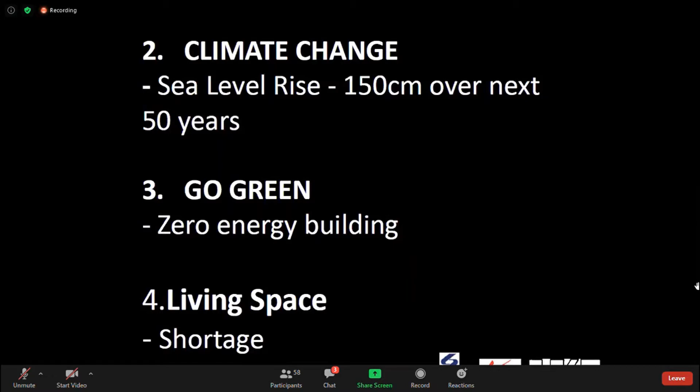Shortage. Then item number 5, challenge number 5: water. So, as everybody knows, we are relying on our neighboring country for water supply to some extent. We are trying now to create sources to have a self-sufficient supply of water. So what can we do, or what have we done? We'll share with you later on shortly.

So these are the challenges. Next, workforce shortage. Typically, our local people are not so much involved in the brick and mortar laying, construction. So we rely a lot on foreign workers—we're talking thousands of work permit holders, not to mention other supervisor grades, manager grades, and engineers or whatsoever. Just on work permit holders, we have got 300 thousand in the industry. So what can we do, or what should we do? Government has also come up with some ideas, big directions, so we'll share.

The next challenges. What do we face? Materials. This is also one of the challenges, on and off.

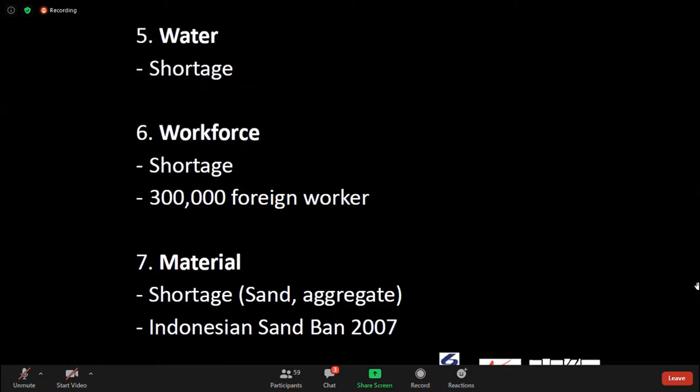Okay, so these are all the challenges. Number 8. So this is also another big challenge that we are facing. We want zero fatality rate on construction sites, particularly in the construction site.

We always tell ourselves, one failure is too many. One fatality is too many. So we try to bring it down where we can. We have come up with a lot of ideas here and there on what to do.

Last year, 2019, the numbers worked out to be 1.1 fatalities per 100,000. Our target at 2028 is 0.9. So these are challenges. It looks like last year we moved nearer to our target, but more can be done. As we said, one fatality is too many. Life is just too precious to lose.

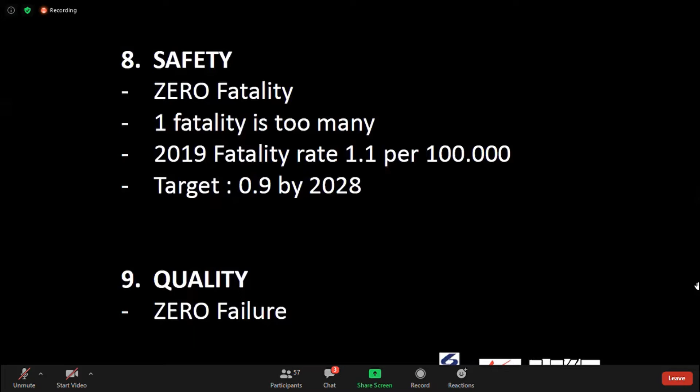Okay, so the next challenge is safety and quality. Similarly, we say zero failure. I will share with you over the past years what failures we have had. 1979 - I guess many of you were not born yet.

Our Eunos viaducts came down during construction. The next day, I went there, I was on the site, to see how the cracks had actually developed, and so on and so forth. So that's just to share with you, things like this have happened before.

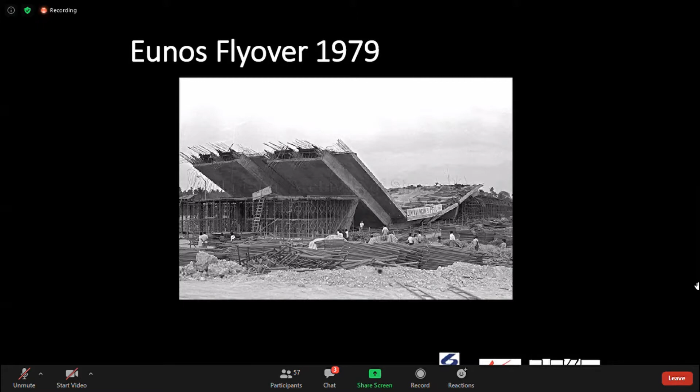We are still doing very well because we are not having that many failures per se. Okay, then the next one.

This one is actually so far the biggest failure in our history, where we claimed 33 lives, 33 people were killed. I assume many of you are still not born yet. The alumni may be around - some who worked for 10 years were probably aware of this.

The New World hotel collapse in Little India - a 7-story hotel collapsed, and then the rubble could be seen. Okay, next.

This is also another collapse - a school roof structure during construction collapsed, in 1999. The next one, this is another big one, Nicoll Highway.

When Nicoll Highway collapsed, I was actually sitting in my office. I looked out the window and witnessed the collapse - I saw fire coming out at the side. My office is just next to Nicoll Highway, happened to be that way. So these are the things we should try to avoid where we can.

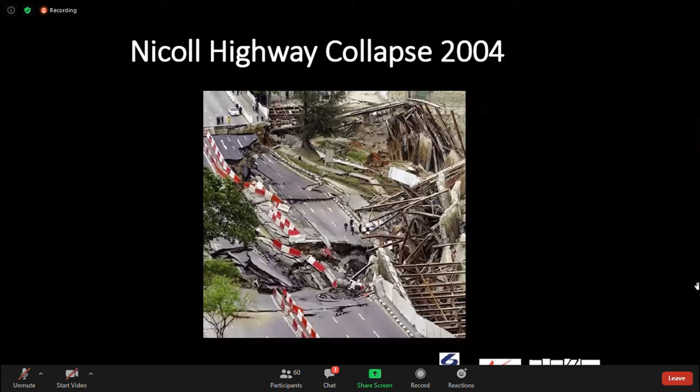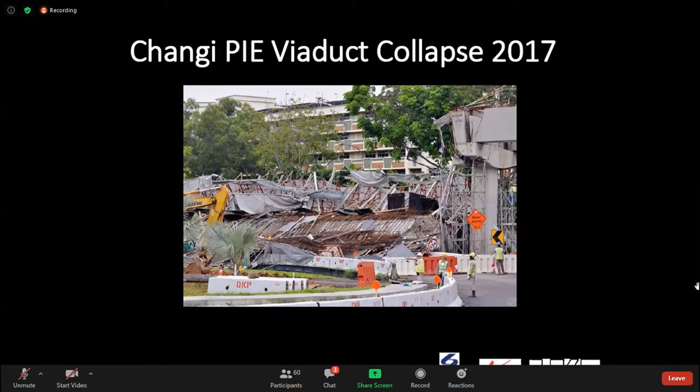Okay, next, the last picture to share on failures will be the Changi viaduct collapse, 2017 - coming up to 3 years, 2.5 years now. These are some of the biggest ones that we noted, and we want to share with the younger generations. We should learn from our past experience and try to avoid it.

So as far as quality control is concerned, these are the challenges - we want to make sure there's no collapse, no failure again. One is just too many.

Number 10, productivities. We want to improve the productivity of our construction industry, our built environment industry. We were told that this industry still has a lot of room for improvement in terms of productivity. We are still quite old-fashioned in a way. We'll discuss the solution later on.

Then comes the economy, of course. After all the other challenges we mentioned, now we talk about economy. We also want to bring down the cost if we can. We want to ensure safety, ensure quality, ensure productivity, and so economy.

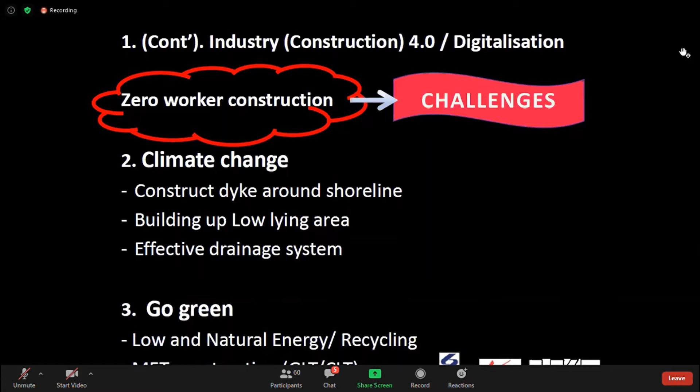And then on the other hand, BCA are also pushing for timber construction. Our current technology, or our current building materials in the industry, are mostly dominated by steel construction or concrete construction. So now we are also saying, why not timber construction to go green? Because timber is the type of material that has the least energy input for construction. Steel gets the highest. So think about it, what we can do about it. Go green.

So this topic of living space, what solution can we look into? Of course, one is go tall, go up to the sky. We'll build taller buildings, build more into the airspace. This is also one topic. Some study has been done: can we build blocks of buildings over the rail line? Let's say, for example, an MRT station. So how could we make use of the airspace? Go into the sky, go tall.

But of course, in Singapore, we have limited constraints. We have problems with height. Just for your information, in Singapore, the general rule is we cannot go taller than 300 meters. The building height constraint is 300 meters at the marina area. This is simply because we are just too small an island, so the control is by air travel. CAAS, the Civil Aviation Authority of Singapore, actually has control on the maximum height that we can go. So our buildings so far are controlled below 300 meters, we cannot go too far, too tall.

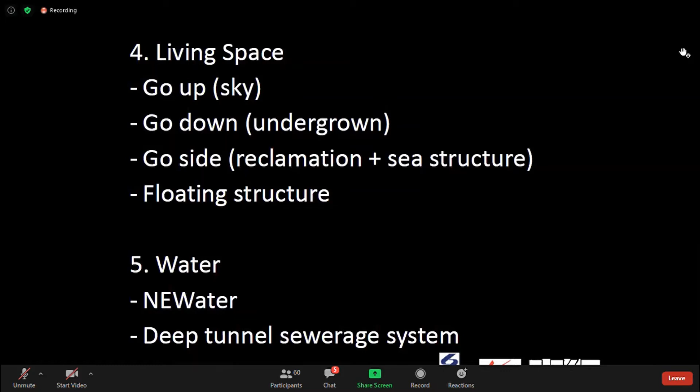The next one is actually workforce. I'm going to move a bit faster now. Workforce—the answer to solve this problem, of course, where we can, is full automation, mechanization, do without workers, or at minimum levels. So this is a concept.

So how? That's why we need you people to come in and join the force to go full automation. The department has got professors actually looking into this area. You all can actually come in and join them.

Material. As far as material is concerned, how could we actually come up with some high performance material—high strength but lightweight? How about recycling material? How about using waste material? These are all topics that we are now looking into.

Prof Tam from the department is also working on these topics, the waste material transformations. And Prof Richard Liu in the department has gone ahead and come up with something that's high performance and lightweight. So we are actually going ahead in these directions.

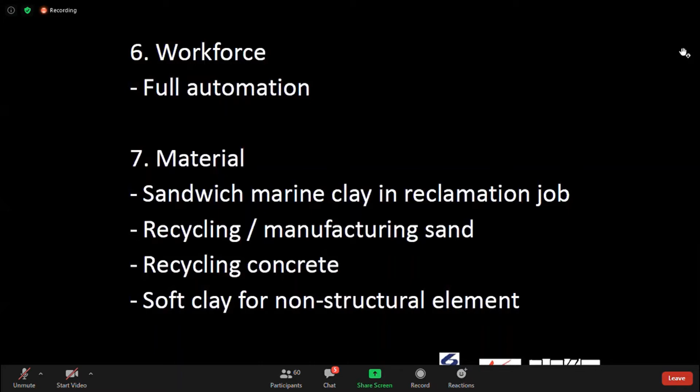What else? Okay, so item number 8, 9, 10, 11—we're talking about safety, quality, productivity and cost. These will be the topics we go into in some detail after these solutions are complete. So I'll mention one more time, to get it clear in your mind: our solution to solve all these issues will be IDD, Integrated Digital Delivery.

Next one, plus technology. Technology has got two parts: one is digitalization, one is automation. Then the third one will improve our construction industry—smart construction with advanced material. So with these three big topics coming together, we are moving ahead: Construction 4.0. This is a keyword we always say—Industry 4.0 transformation, applied to construction, we call Construction 4.0 transformation.

Just for your information, among all the industries undergoing Industry 4.0 transformation, our industry is one of the slowest in terms of transformation. We are still quite old in terms of technology adoption. So we want to encourage every one of you to move ahead, to transform the industry as much as we can. We've got to catch up to 4.0. So we have got a roadmap for that—we'll share it with you later when we talk about robotic construction.

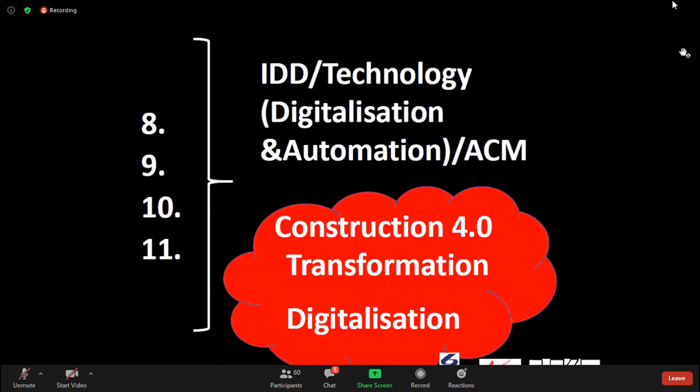And then, as I said, the two main parts of technology: construction industry 4.0 transformation technology—digitalization and automation. Good. So the last challenge, item number 12, again, make a guess—what is this character?

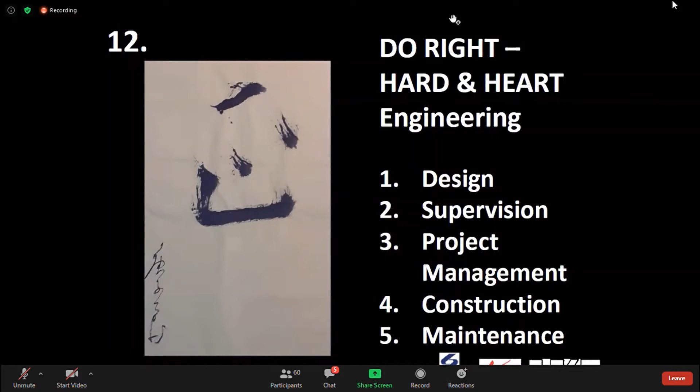Okay good, so now we will move on to a slide. We're going to move on to the third topic on smart construction technology. I'll show you the slide first - what people have done. I will show you a video. Some of you may have seen it, some of you may have not: the history rewritten.

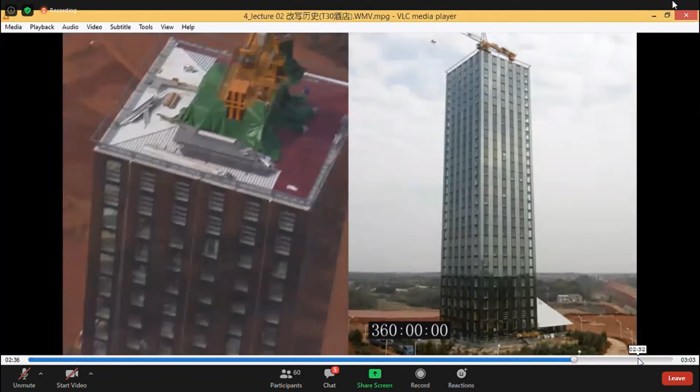Okay, yeah, we continue. Yeah, all right, okay, so now we have seen the video.

It's actually a real construction in China. Some of you might have seen it. This is a 30-story hotel building. It was completed within how many days? 15 days. Just imagine that. Of course, this 15 days is merely assembly time, meaning they've actually done all the fabrication outside. They just bring it here, and then 24 hours, they fix it up and assemble. But nonetheless, it tells you one thing: the perfect planning, the perfect logistics, the perfect arrangement, the fit and design efforts - these are all examples of perfect planning.

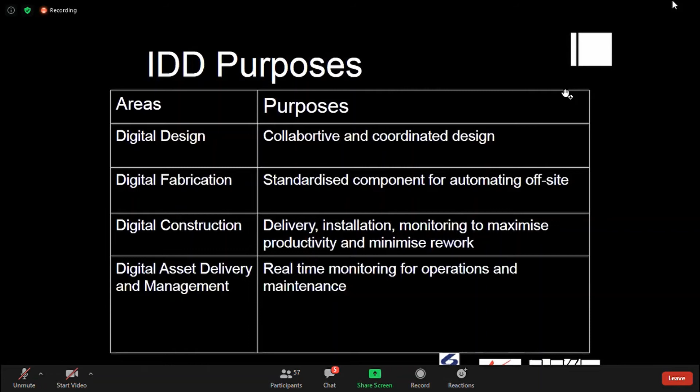So we move on, IDD purposes. This one is just to share with you the 4 areas with IDD purposes of digitalization. Now this will be the last topic we share in terms of technology and automation. The whole thing I'm trying to summarize for you is the digitalization and automation process, the technologies involved. If you count them here, there are altogether about 15, starting from BIM until the last one, IoT. These are all the 'in' things now that every one of us should more or less know, and if we're in the industry, we should use them.

BIM - I think recent graduates might have learned it before, the older ones did not, but you can also learn it from outside. In school, Dr. Justin is teaching this subject matter, so students, pick it up, BIM. This is an 'in' thing now. It involves technology for design purposes. I'll go through it one by one quickly to share with you what they are, examples, and the challenges we can move ahead with. We're trying to go through it quickly because time is short.

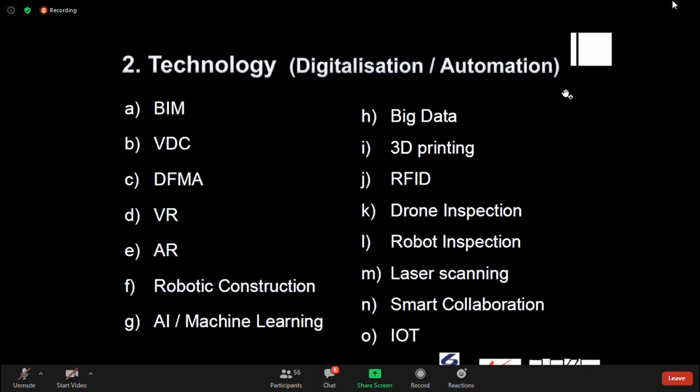Okay good, so now BIM - building information modeling. In the old days, architects came up with architectural drawings in the design. Now we're talking about design - the application is design. Architects come with architectural drawings, structural engineers have to look at it and come up with our own structural drawing, and so do mechanical engineers. Then we have to coordinate among ourselves. Sometimes we overlap, we clash - the building design clashes here and there, we don't know. So BIM is a process allowing us to share information.

So this is called building information modeling, where every one of us shares the same model. A model that comes from the architects at the start will then allow us to put in all our other information - structural information, M&E information, and contractor QS information - all into one model. At the end of the day, facility managers, starting from developers, consultants, contractors, and facility managers can all use this set of drawings, this building information, for many purposes. So this is the whole idea.

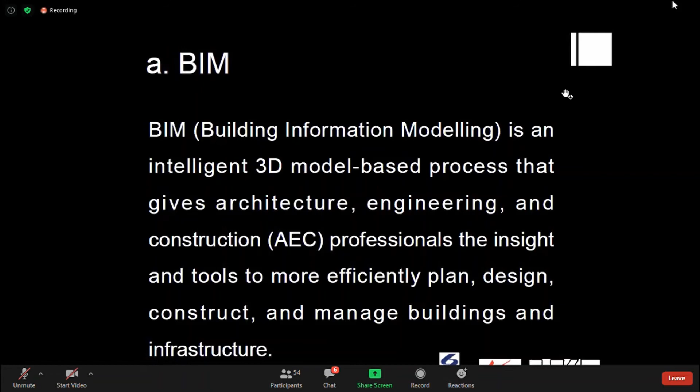Of course at the moment there are still some hiccups here and there. The platform still has some improvements to be done, but never mind - the concept is going ahead, we are pushing ahead, BCA is pushing ahead with BIM for submissions, drawing, design submission. I'll share with you some challenges shortly. So this is BIM, to cut it short - this is a model.

So let me share with you BIM applications. As I said, BIM technology, this intelligence system, the coordination modeling 3D coordination system, will be good for 3D application. What is 3D? It's for design. So BIM will be used in design - architectural, structural, M&E. Of course, in our topic's context, we say structural design. How could we use BIM in 3D?

4D is for project management. Before project management, as I said, in the market there are a few BIM software, about 4 BIM software available. Then our structural design software - there are plenty. We call these A&D software.

So how do we integrate them together? This is one challenge. For example, for design software you have STAAD.Pro, you have Trimble's Tekla software, and so on and so forth. And for BIM software, you have Autodesk Revit, commonly used, then you have ArchiCAD, and then Bentley and Tekla. So you have all this software available.

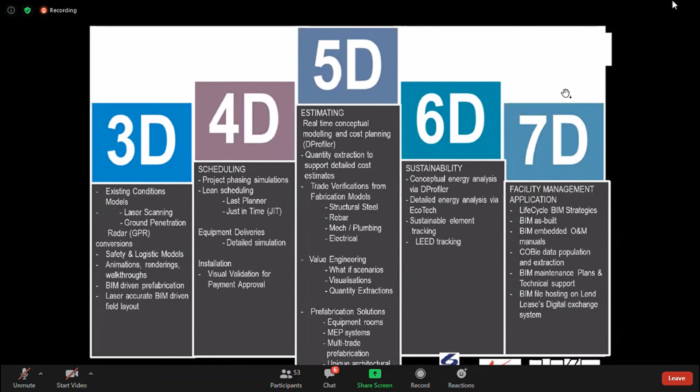6D, the 6th dimension, is on energy saving, sustainability checking. 7D is facility management. So this will complete the whole life cycle of a building development where BIM will be used. You digitalize the whole process, then the sharing will become effective, easy and simple - theoretically speaking.

So what are the challenges? As I mentioned, currently we are still not perfecting our application. Many engineers and architects come up with a BIM model that may not be complete right at the beginning. So what should engineers do? Ideally speaking, once the architect's model comes in, engineers should work on the BIM model and automatically send this information to the design software, A&D software, get the analysis and design done automatically, and come back to BIM software for the answer. But unfortunately, at the moment it's not like that.

At the moment in the industry, assuming you are a structural engineer, the architect comes up with a BIM model. So what do you do? You don't actually develop your structural BIM model immediately. Rather, you take advantage of the grid lines of the architect's model and build your own A&D 3D model for your structural design using another software. You build another model, then come up with the answer, then pass it back to your drafter to build the structural BIM model. So you've actually gone one full round. These are the issues.

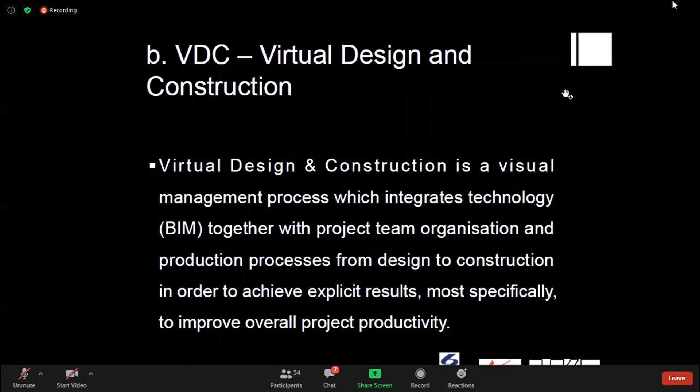We'll move quick, so okay, then we move on. These are our processes, so the challenges are here. We are saying that at the moment, we have also actually built up a 3D virtual geotechnical model underground, so the geotechnical property data collections have been done.

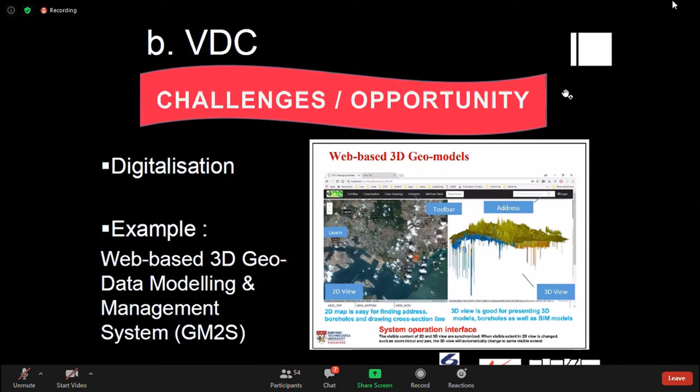So this year we actually have the research done by NTU Prof. Chu Jian, and a geotechnical model - a virtual geotechnical model - has been built. In short, in future if you need any soil data, you can go to this model and even get a virtual value for you. Okay, quick one - these are all the things that are happening now.

Okay, come now, DFMA. So these are big topics. In the old days, we did 1D, 2D, 3D precast. Then today we're talking about PPVC. Now we're going one step further. We want pre-finished, prefabricated construction. So old days: 1D, 2D, 3D precast, then PPVC. Today our new initiative is advanced DFMA. DFMA stands for Design for Manufacturing and Assembly, meaning you build the building, prefab the components in the factory, bring them to site, and assemble them.

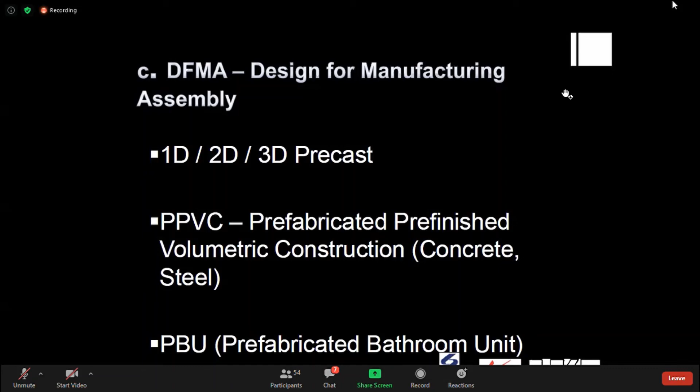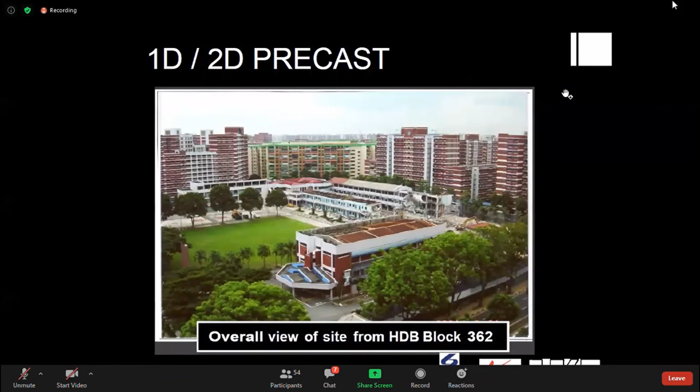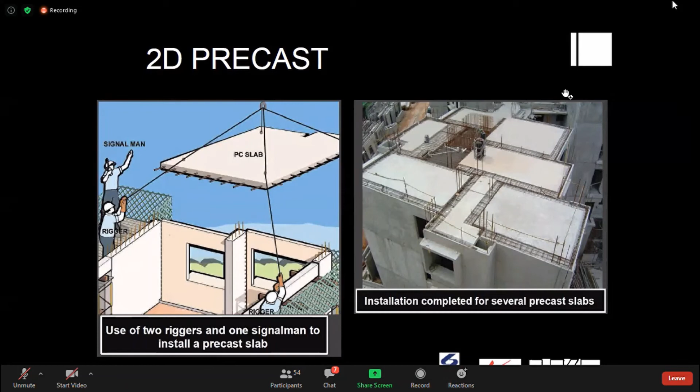So now our last challenge is actually advanced DFMA. I think we're going to move fast now. This is to show you 1D, one dimensional. This is 2D: one column, beam, and slab. These are 2D overview examples - the slab, hollow core slab, the plate slab being lifted, and wall construction. These are all 2D construction methods from the old days.

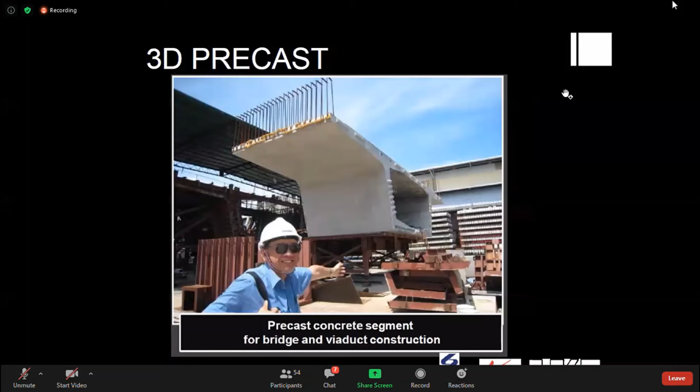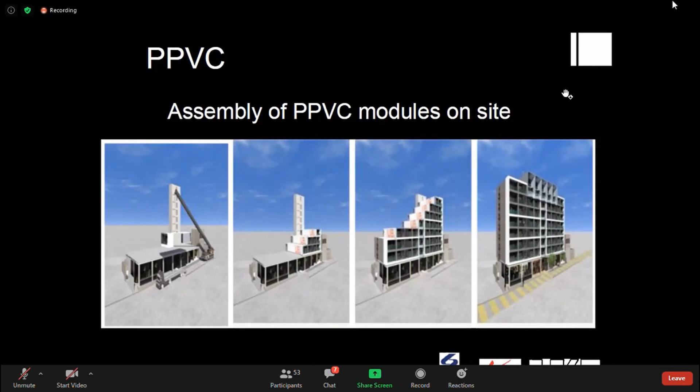Next, this is PPVC construction of a private condominium - a box. You see this one at NTU, it's all boxes. So every house unit is cast as a box in the factory and brought to site, like Lego construction, you join it up. For those who haven't known this, here's the information. Some of you have learned it, so do as much as you can. Now these are all boxes, let's move on quickly.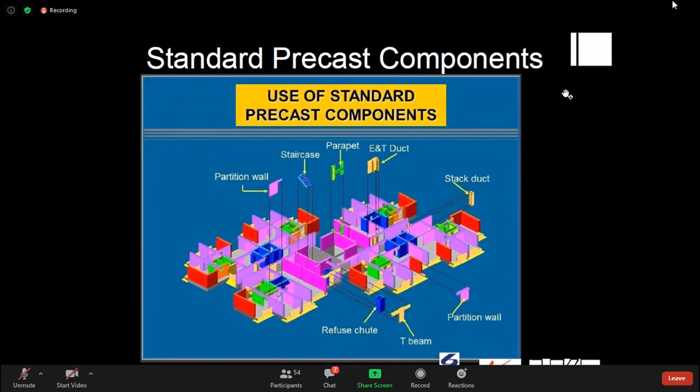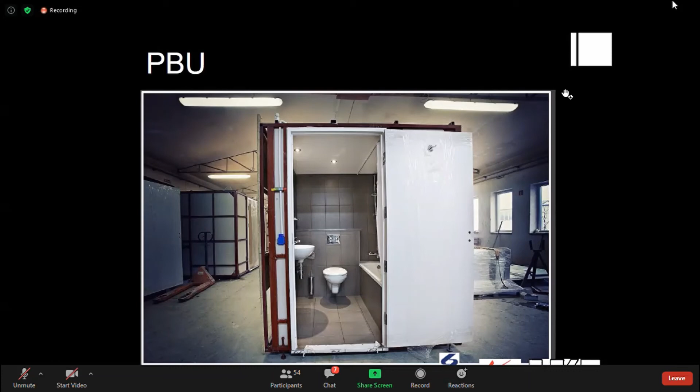So these are all the component plans that we can do - all precast where we can. Now 3D PPVC - this one is a toilet. So we've been talking about this, PBU. This is a prefab toilet. So what are the challenges?

The key thing we're trying to share with you: to lift up a box, there are a lot of constraints imposed by LTA on the road. When it comes to site, imagine one concrete unit - guess how heavy is one box? It varies depending on your design, it can be 25 tons up to 45 tons. So when you build a big box, of course it's heavy, and lifting it up is a challenge. So far the biggest crane we can offer is to build a 40-story building at Clementi, where one unit weighs about 45 tons.

So these are all challenges, we already have a lot of issues. Therefore the challenge for you, the younger generation, is to think about how we could come up with a bigger crane system. I think Prof. Paul would be a good person since he's in the offshore industry - they used to lift very heavy structures in terms of weight. So this is one area, heavy lifting, that we can think about. The other way is to cut down the weight of the members, the components, the boxes, using Prof. Richard's answer: high performance concrete, but lightweight. So these are directions we can move ahead with.

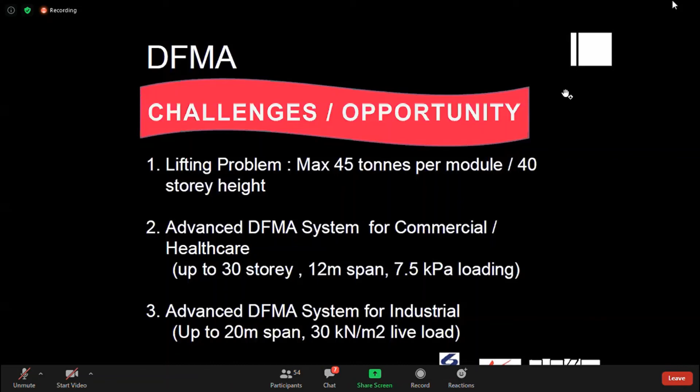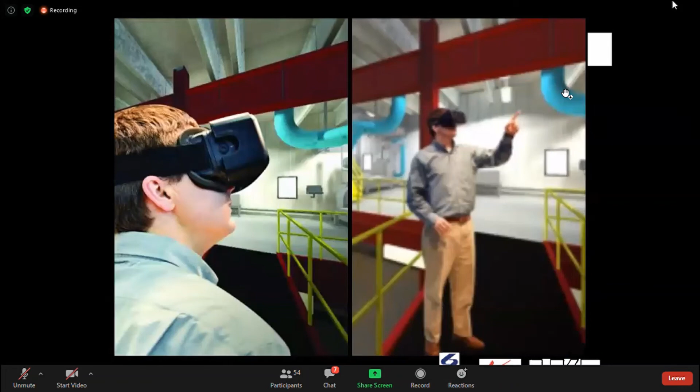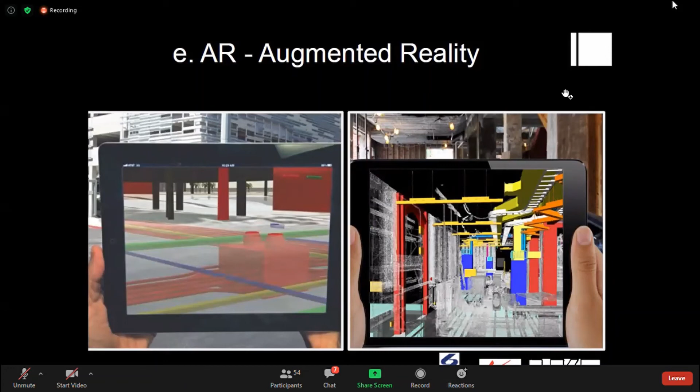VR, AR - I think these are things we're using now to see virtually. I think a youngster like you plays with it every day, so I'll leave it out - VR, AR, virtual reality and augmented reality. You can make changes as you like, you can walk through the building. Okay good, so on this I have got one challenge for you.

How to use AR and VR technology. I want to build a virtual 3D model of underground services. Very often, StarHub or M1 fiber cable gets cut, PUB water supply gets cut, or power goes off without supply. Recently, particularly M1 got into issues. So what's the problem, and how could we avoid it?

Most of the time this happens because contractors cannot see what cables are laid underground. They excavate and end up damaging them. So I'm proposing a 3D virtual model of all underground services. Can we create a virtual 3D underground services model, like what we've done for the geotechnical data 3D model? That's step number one.

I want to allow the worker to put on AR glasses. Then when you're doing work on site, you can actually see where the services are below ground, so you won't damage them.

Okay, I have a challenge for you. I want a sensor stuck on the underground services pipe, so anytime we can pick it up from above ground with a drone or a scanner machine, we can detect the sensor. The challenge I'm posing now: can I have a sensor that is maintenance-free? I don't want the sensor to need changing. If it's battery operated with a 5 or 10 year lifespan, I'd have to re-excavate and install a new sensor. I want a maintenance-free sensor.

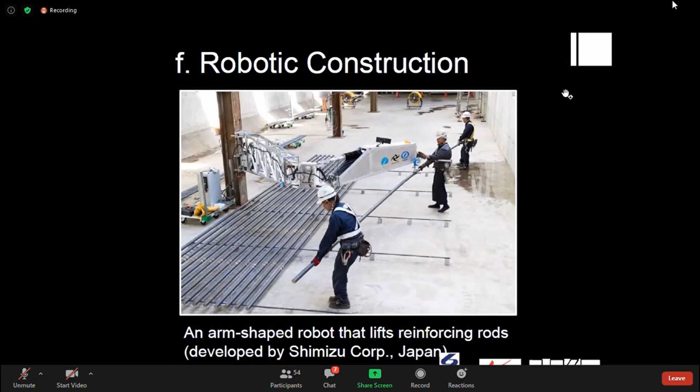I think I have no time, so I'll move on quickly through robotic construction. You can see there are many advantages of robotic construction—just imagine the whole construction being done by robots. That is our challenge.

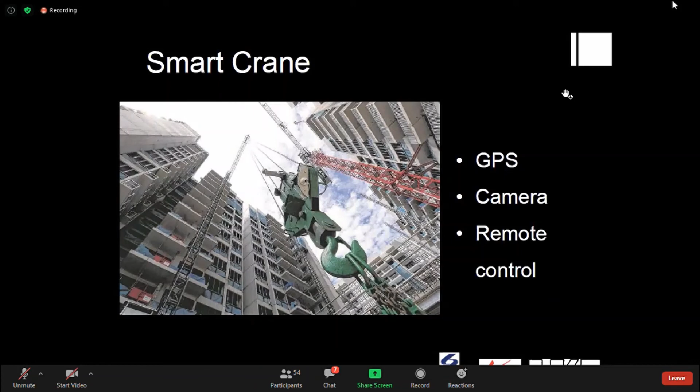So what is this one? Smart crane—we've actually built a smart crane. Professor David Chong also has a solution: a smart crane with sensors built in, for safety consideration, so the operator doesn't have to stay at the top of the crane, improving safety.

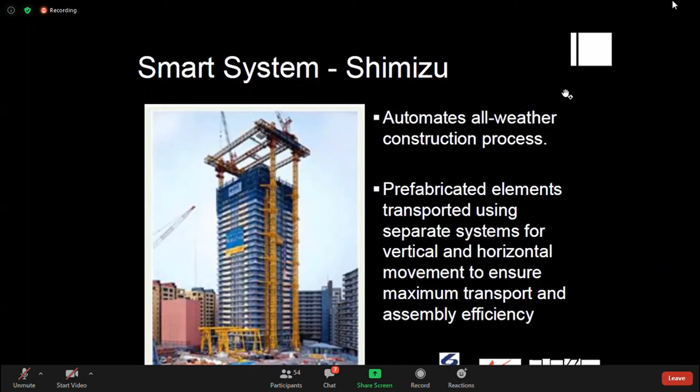These are two examples of smart construction, robotic construction done by Japanese contractors—one is Shimizu, the other is Obayashi. Both have done jobs in Singapore: one at Cecil Street about 20 years ago, and one at Toa Payoh Housing Board HQ. Shimizu did Toa Payoh, Obayashi did the one along Cecil Street.

They have a big roof, a big canopy covering the construction from weather, so work can continue despite conditions. Then there's a mechanized, computerized transporting system—lifting components from floor to floor vertically, and horizontally computerized. So automation has been done for quite some time already; the Japanese are among the most advanced in automation and robotic construction.

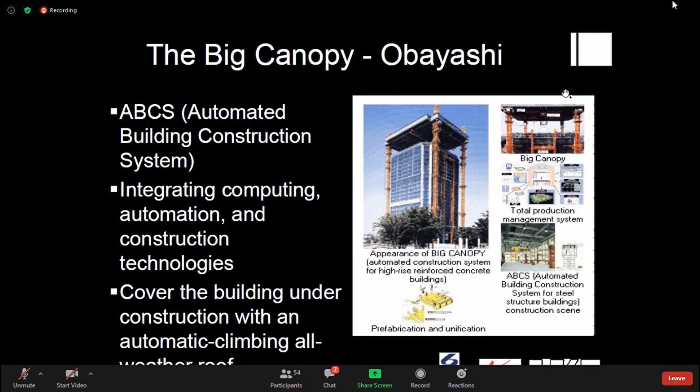Okay, we'll move on. We've actually got a challenge for that, and we want to come up with something recently.

BCA wanted to have a roadmap study for robotic construction. How could we actually move, and where can we move in the next 10 years? Our target is to meet world-class standard of robotic construction. So over 10 years, we are going to come up with an idea and viability to make sure our robotic construction will go ahead. Of course, the key thing we are fully aware of is that cost is an issue.

Therefore, the suggestion is to go Uberization, sharing. One party cannot afford to buy the equipment, so we share. So these are the things we have in mind: technology, we must come up with AI, mechanization, sensor, IoT. Then for cost, we share. That's one part.

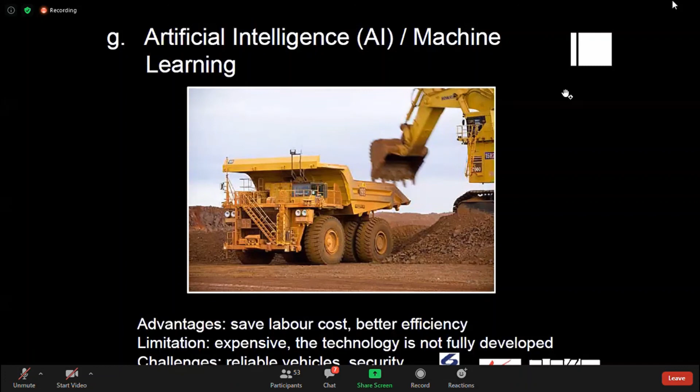Okay, we move on, quick, I think we are short of time now. So AI and machine learning - we want to train our machine with brain thinking. Machine learning has got three parts: supervised learning, unsupervised learning, and reinforcement learning, which means you can actually teach a machine to learn as much as you can, like we are teaching students like you today.

We are going for reinforcement learning, where you actually go through many projects and learn from there. Besides that, supervised learning means you are in the lecture hall and we teach you. Unsupervised learning means you can actually learn it outside on your own.

Okay good, we move on. I think these are the housing board's efforts. Our government housing board actually have done some work with AI to help on safety monitoring system.

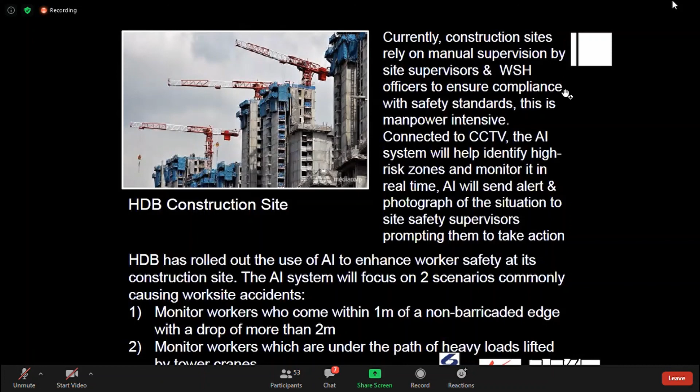So what is this one? AI, machine learning. So our challenge to you is actually to have full automation, zero worker. So think about it.

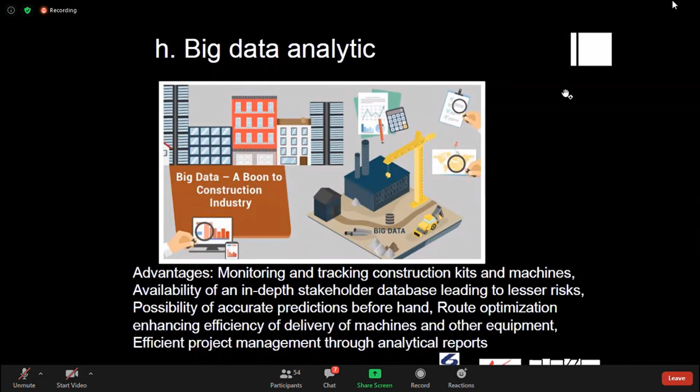So big data analytics - in the construction industry we have so much data collection. So how do we use technology to analyze them, to predict, to have efficient optimization? So this is a topic. Okay, we move, next topic.

3D printing is another new thing that's coming up. But the challenge is how to print the concrete structures with the reinforcement. So 3D printing for non-structural work so far, okay. It's been reported - our NUS also have got 3D printing done.

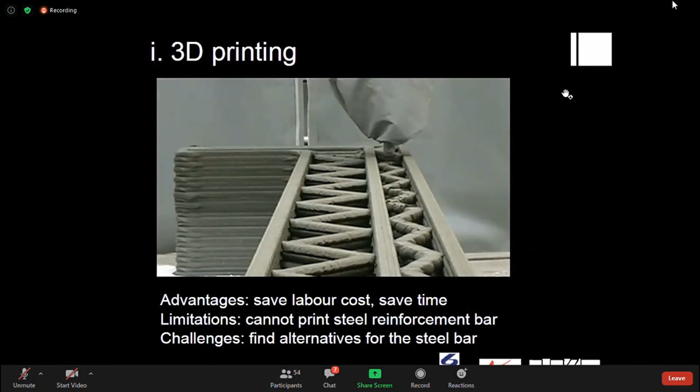So now we move on to 3D printing - you can print a building in a short time. Housing board also have done some. So these are efforts the housing board has done with 3D printing. They actually have come up with a grant call to encourage or invite researchers who do 3D printing.

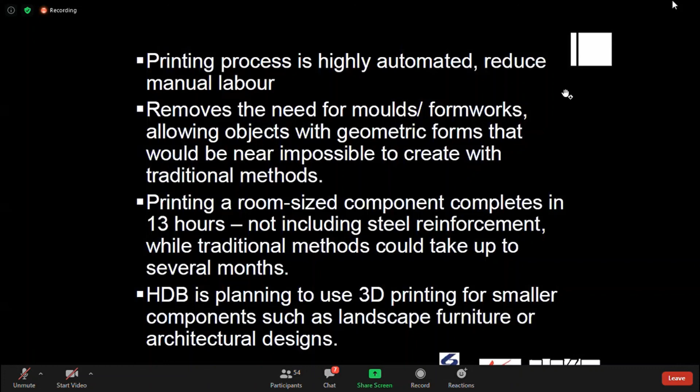So the challenge at this moment - we move on to the next. The challenge to do 3D printing, theoretically speaking, is printing concrete - no issue, right? Your nozzle, you print concrete. But the challenge is actually how to print reinforcement. So now we are going with an idea of printing without reinforcement.

So Prof. Tan Kiang Hwee from the department is now moving ahead with fiber study - fiber added in to replace reinforcement. We have actually done some buildings of that kind in Singapore, a small one, on the ground floor, on the pile cap, ground beam - some kind of reinforced fiber has been used.

So this is a challenge: print the building without steel bar, using fiber. Okay, good. So what's next?

Also this one, RFID and QR code. So what is the difference between RFID and QR code? RFID will allow you to track the component's movement. QR code only allows you to track where visible - you can see it, you use your QR code. If you cannot see it, you can't use it. QR code will not work, but RFID will work.

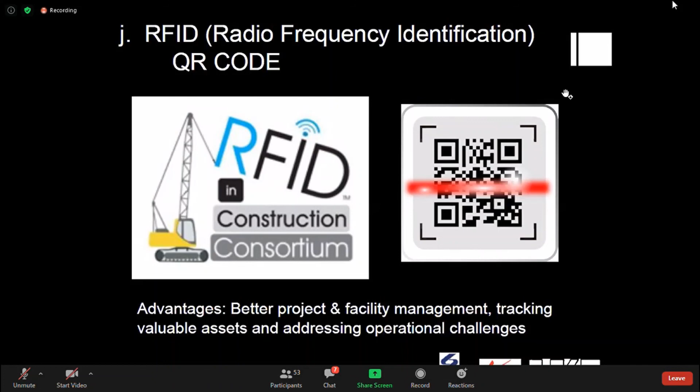RFID goes on this radio frequency, so even if you can't see the component but you are near to it, you can still pick it up if you know where the component is. So the advantage is tracking - quite obvious. So we move on.

Yeah, move on - these are the equipment. So, drone inspection. Very obvious - drone will help us do a lot of work on facade inspection. So this is coming out as a topic too, a hot topic. Our facades need to be inspected from now onwards. BCA is actually putting it as a law to do facade inspection. How do you climb up a 60-story building? So drone will come in.

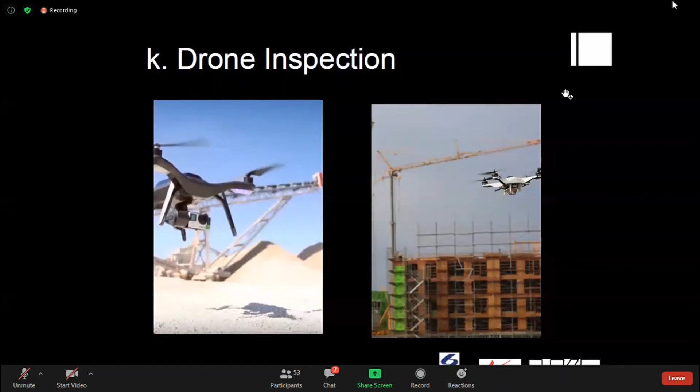Yes, okay, I think I have no time already, I just move on.